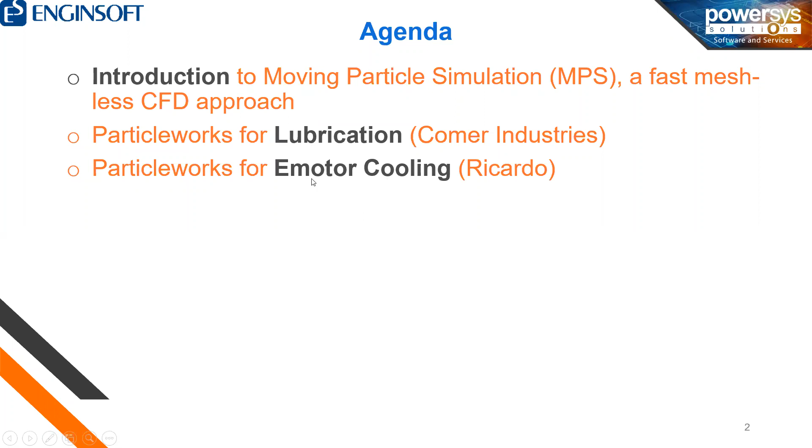Lubrication, of course, is the historic milestone, the first application for Particleworks, in lubrication in gearboxes. E-motor cooling is a very important application that's increasingly of interest, and we will present some test cases in collaboration with important players. Then I will mention the coupling with JMAG and how we can transfer the files and information, namely the HTC information, the heat transfer coefficient maps, to a JMAG solver to perform the thermal analysis.

Other applications are piston cooling, hydropower generation, and also the field of food and beverage. We will cover all of that with some examples, just to give an idea of all the fields and the capabilities of the software.

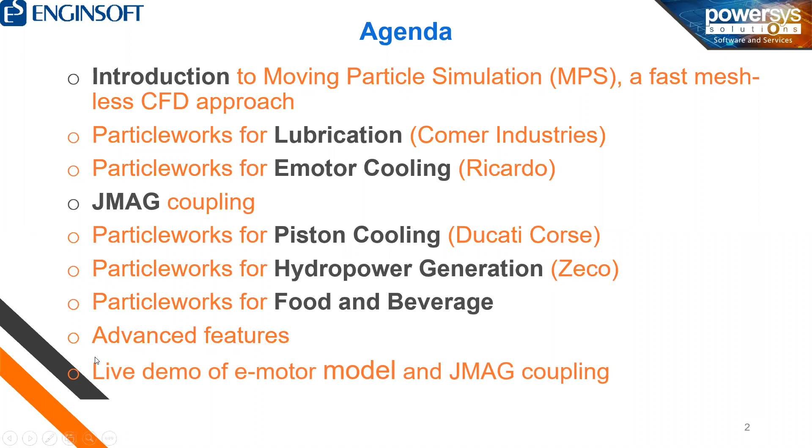In the final part of the presentation, I will present some advanced features of the software that could also be of interest for you. And then in the second half hour, we will do a live demo, just to give an idea of how fast setting up a simulation is.

Talking about the methodology, as already mentioned, Particleworks is based on the meshless MPS approach, the moving particle simulation approach. In this approach, the fluid is discretized with particles. We don't have any mesh to be generated; in fact, the mesh is based on the particles themselves.

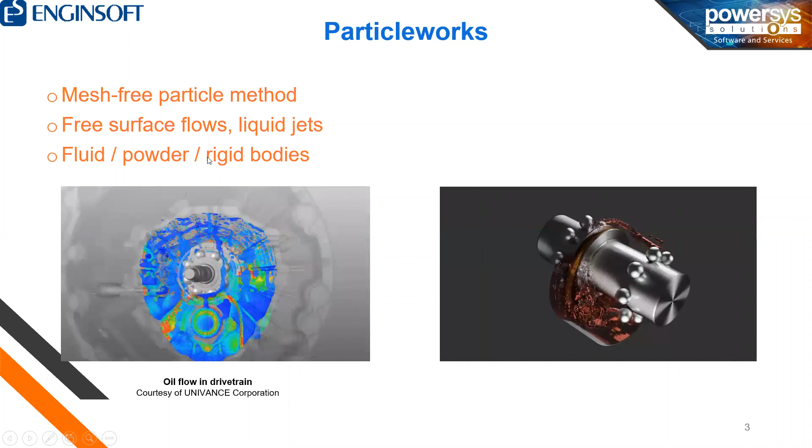This methodology is very ideal when we have a lot of rotating elements, because again we don't have the mesh to deal with, and it's very easy to set up the case. Also, when we have splashing phenomena or jets, it's very suitable. Here is another example with a rigid body coupled with the fluid solved with Particleworks. We also have multi-physics solutions like fluid, powder, and rigid body coupled with the fluid.

As I mentioned, contrary to what is found in conventional methods, we don't have a static mesh on which we solve the basic CFD equations, Navier-Stokes and the continuity equation. Instead we have this dynamic mesh. The idea is that every little particle is representative of a certain amount of oil, a volume of oil, and we solve the usual equations with this Lagrangian instead of Eulerian approach — a dynamic mesh that is able to follow the fluid flow.

This methodology was proposed by a professor in Japan, Professor Koshizuka, who is also a co-founder of the developer of Particleworks, Prometech Software.

Since mesh generation and CAD preparation are no longer really present with this methodology, you can see that the simulation workflow is significantly faster. In fact, in less than 1 day we usually have a working setup.

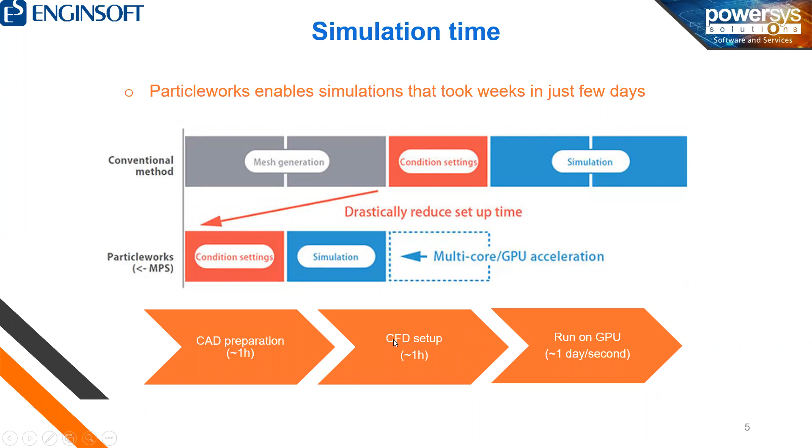And when we launch the simulation, the algorithms behind Particleworks, which are highly parallelizable, can take advantage of GPU acceleration. So we can launch the simulation on graphic cards instead of cores, and we usually see a very strong acceleration. Because of that, what previously in some cases took more than a few weeks can now be simulated in less than 1 day, or surely less than 1 week.

What are the applications that can take advantage strongly of this approach? As I mentioned, gearbox lubrication is the main field, the historic starting point for Particleworks, because you have rotating elements, you have splashing, so you have all the basic, let's say, features of a system that is highly compatible with Particleworks.

Also, e-motor cooling is nowadays very important for the automotive industry. We have jets on the windings and all the critical elements, as we will see, and we can analyze those very efficiently with Particleworks. We also have the possibility to study highly viscous fluids like chocolate, glue, cement, and so on, because we can include different viscosity laws.

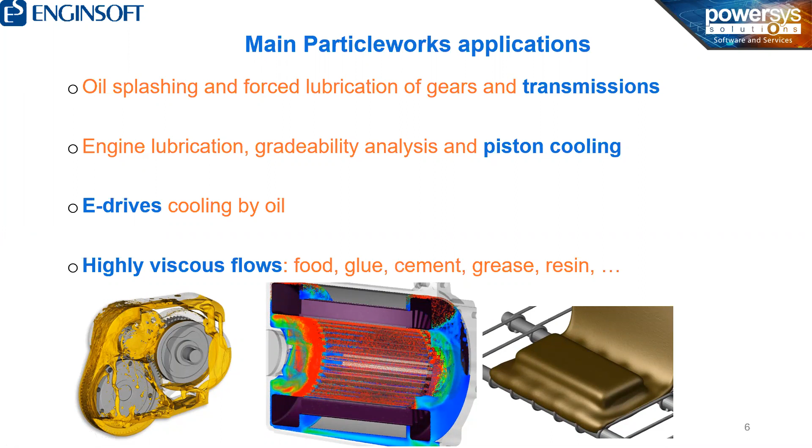On that, we can also model grease, so a very, very viscous fluid, as you can see here for bearings lubrication. Bearings lubrication is very important. We also have another example here with the rollers moving with a specific rotation on top of the rotation of the shaft. We will not have time to go in detail on this model, but it's very interesting also to see the pumping effect of the rotating rollers just below here.

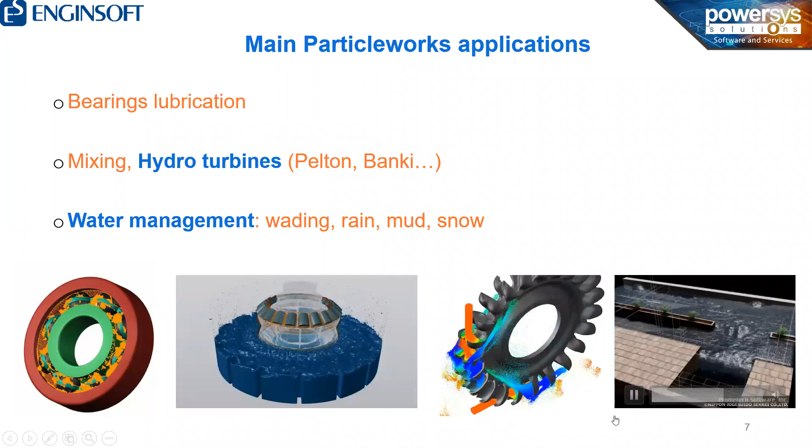Then we have hydroturbine analysis. This is also a very interesting field. We will present some results in detail. And of course, civil engineering applications for water management, as you can see here. So let's go in detail about the applications and also the validation with experimental data.

The first test case I want to show you is the analysis of the coupling gearbox found in this system. The application is a wheel loader, and this element was analyzed with Particleworks in collaboration with Comer Industries, a big Italian producer of gearboxes and axles. The idea was to evaluate the lubrication of this system at different rotational speeds and rotational directions, as well as mounting angles. The target was to compare results from simulation with experimental data.

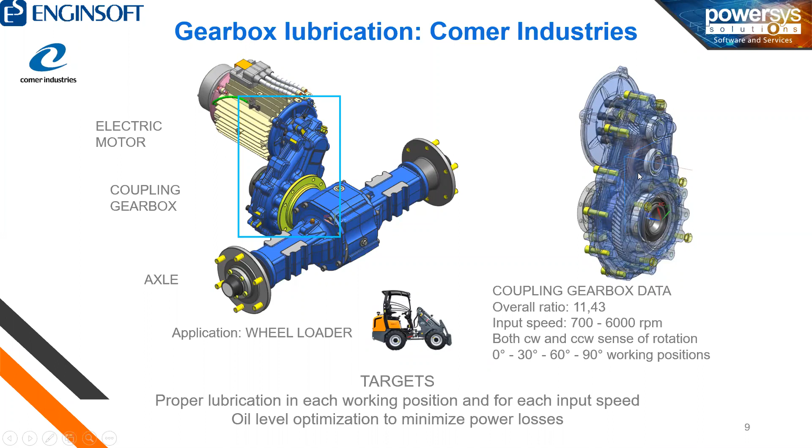What is usually done in this kind of system is to build a clear casing, as you can see here, and analyze the oil distribution visually. Of course, this type of testing requires a lot of cost in producing and manufacturing the clear casing, and also waiting times, because the production is not instantaneous.

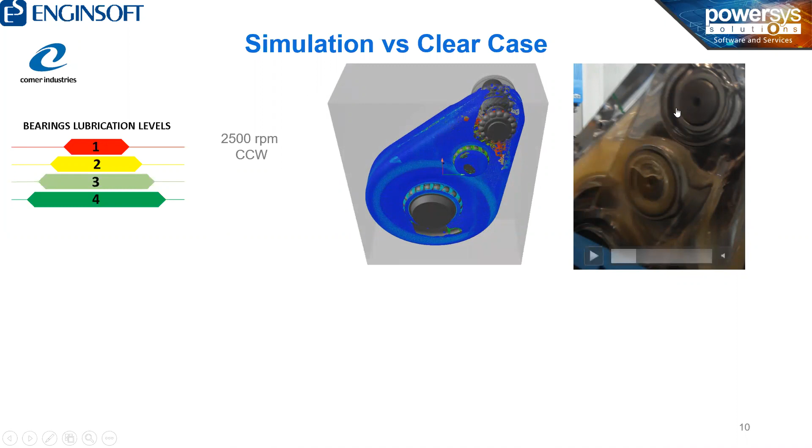We can see here a comparison between the simulation and the same system at the same load condition, and we can quite clearly see very interesting relationships. We have the film formation in the bearings area here. We have very low lubrication on top, as you can also see in the clear casing. Overall, we compared for the different conditions the lubrication degree in all the zones, and found very good agreement. The numbers here represent very good or very bad lubrication levels, and by visually comparing the two, we could see very good correlations across the conditions.

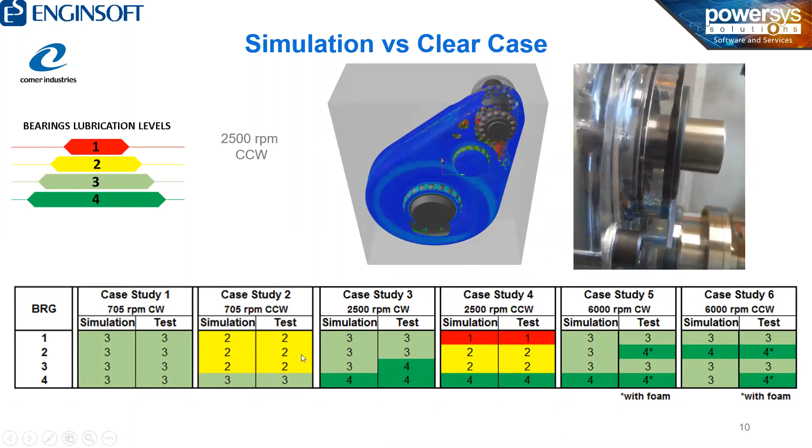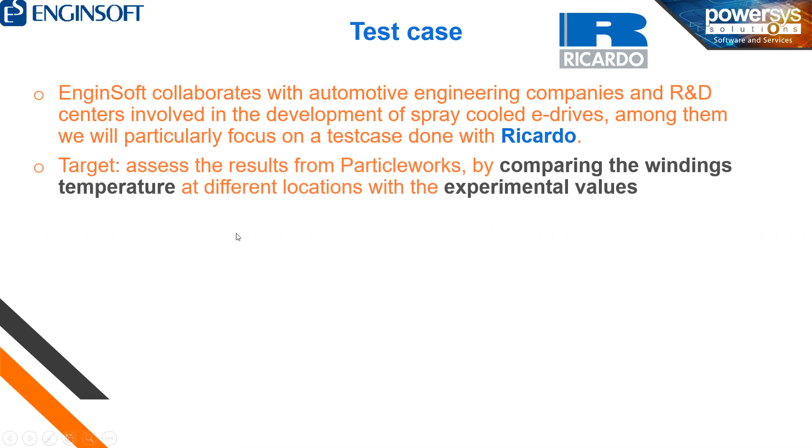On e-motor cooling, we have a very interesting test case and confirmation with Ricardo. We collaborated with them on a project where the aim was to evaluate the temperature distribution, especially in the windings area, one of the most critical areas in e-motor design for automotive applications. E-motor development is a very important topic right now, and power densities are increasingly higher. Because of that, we really need to optimize the cooling; air cooling is not enough, and we want to introduce oil cooling.

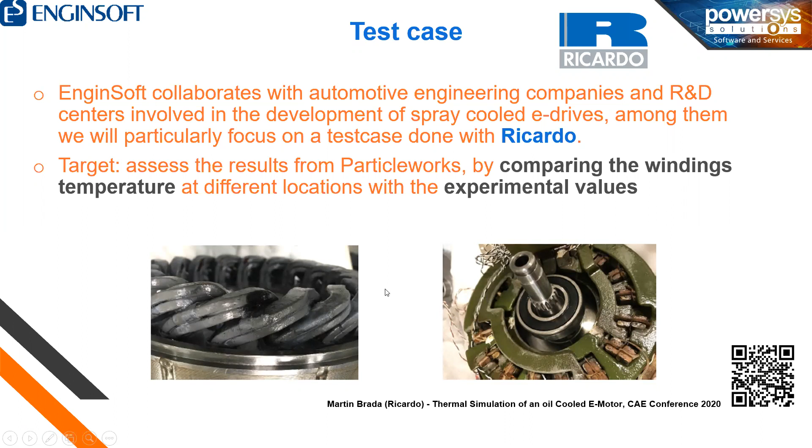The results are also presented in a more detailed paper; if you want to have a look, we have the QR code here. So what is the workflow with Particleworks for e-motor cooling? We usually do the e-motor fluid analysis, then transfer the heat transfer coefficient from Particleworks to the thermal solver, in this case JMAG, which can also compute the electromagnetic losses. We will see how efficient and fast that step is, because we have developed a coupling between the two software. At the end, you want to understand the temperature distribution.

In Particleworks, the e-motor fluid analysis is structured in different steps. We can do, as you can see here, the analysis of the rotor distribution in all the channels. We can also do a jet analysis after the rotor step is done. We can include windage effects and air, since the rotating rotor will cause an air field inside, so we can take that into account.

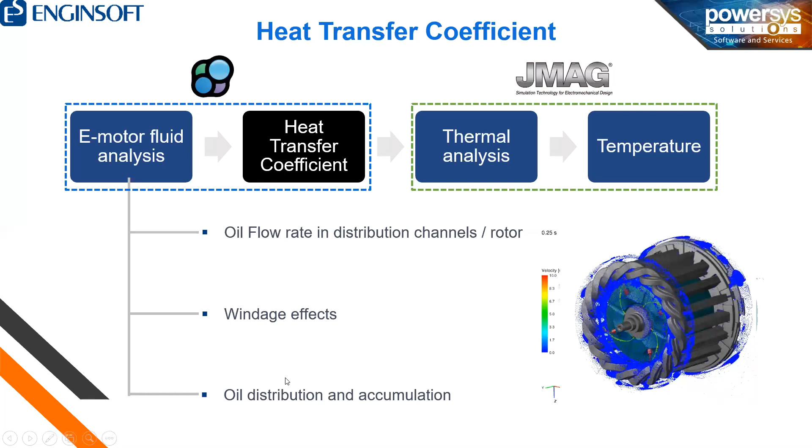At the end, the most important aspect is to analyze the distribution of oil on the windings and in the casing, and where accumulation is. Of course, the last objective is to evaluate the HTC maps on the windings or other critical areas, as you can see here.

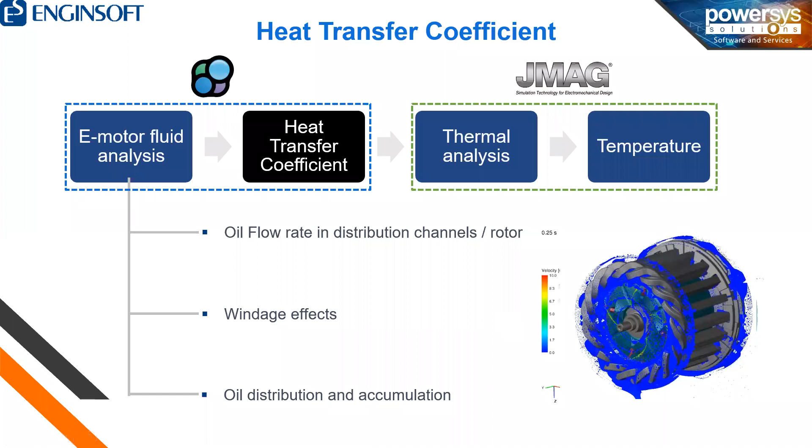So from the accumulation of oil, we can extract the HTC maps. HTC maps are then transferred again to the thermal analysis, and temperature distribution is found.

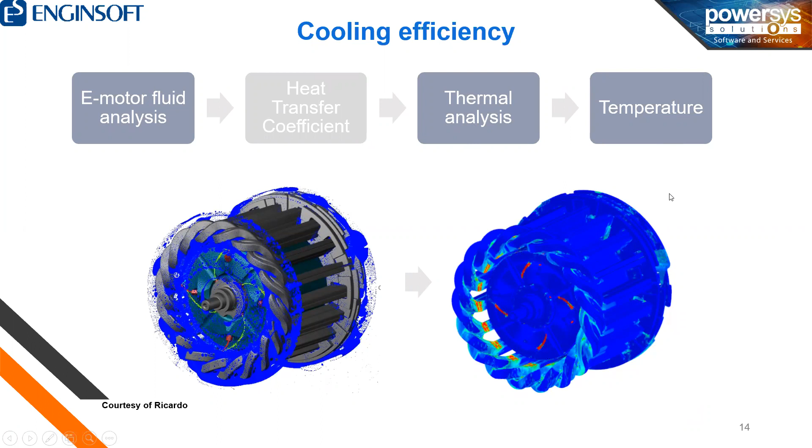In this case, as I mentioned, we wanted to compare the simulation results with the experimental one. The objective was to find a maximum temperature difference between simulation and measurement of 5 degrees. All points in the windings area monitored by Ricardo were actually found in a much smaller range, with a maximum difference of 2.8 degrees, as you can see here. So Ricardo was very happy with this validation, and it was well inside the range they expected.

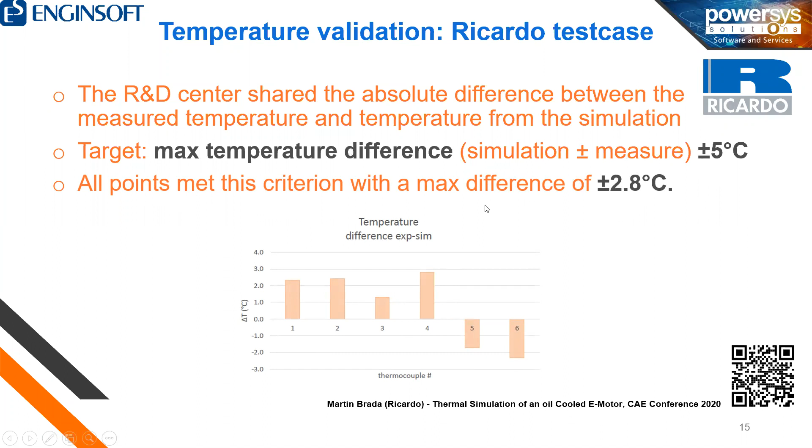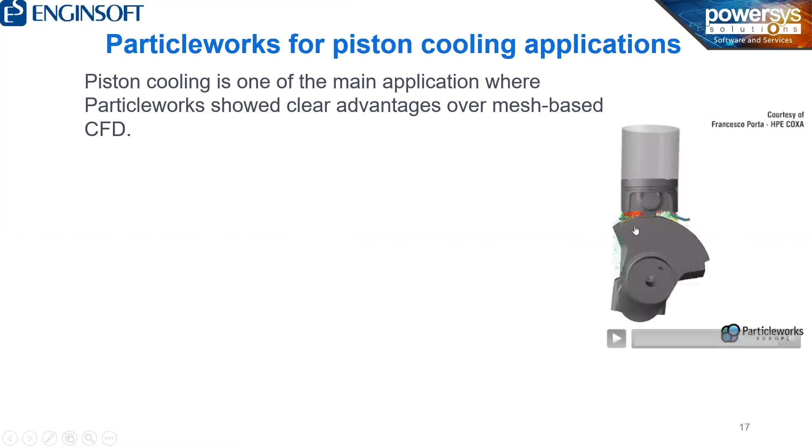Piston cooling is, of course, another interesting application. As you can see, thermal analysis in Particleworks is really one of the main features our customers use, so we have different studies also in this field. Clearly, due to the moving parts and the jets impinging on the piston, we have a lot of advantages over mesh-based CFD.

We have one study with Wärtsilä, a company that produces large motors for naval applications, so very big pistons in this case. Wärtsilä also compared with experimental data in this case, finding very interesting correlations.

HPE Coxa presented last year, or recently, another comparison between meshless MPS and traditional CFD. In this case, the comparison was with Star CCM, and they found that MPS is 10 times faster than mesh-based CFD with very similar results.

This is the visualization of the results for that type of system. As you can see, we have 2 jets impinging on the piston, causing the cooling of the piston.

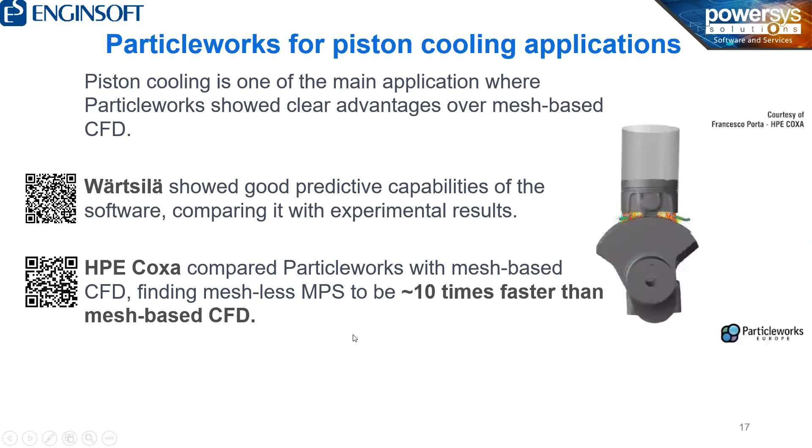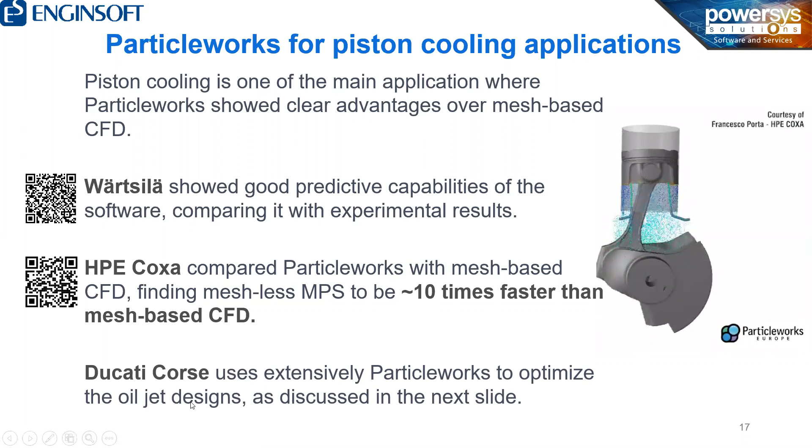Ducati Corse is also our customer. This is public information, as they also published another interesting paper on how to optimize jet designs. We will actually see the Ducati Corse study here. So the idea is that they want to optimize the jet

direction and shape to optimize, as you can see here, the HTC maps and the cooling efficiency in the piston. So they propose different types of application with different splitting of the flow, and they compare the temperature distribution. Again, if you want more details, you can find them following the QR code or visiting the Particleworks Europe website, where we have all the material.

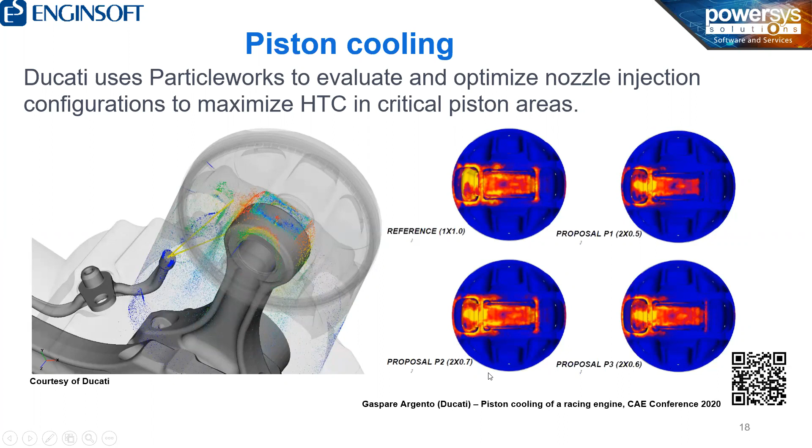Hydropower production is very important as well. I can present you this benchmark in collaboration with a Pelton turbine manufacturer in Italy, Zeco. They contacted us to evaluate Particleworks because they actually use mesh-based CFD, but cannot do full turbine simulation with this methodology. They cannot account for the transient simulation.

They really take a lot of time to do Pelton turbine analysis with traditional methods. So they wanted to investigate whether Particleworks could be faster and more precise, or similarly precise, while also providing additional information like casing-jet interaction or jet-jet interaction, multi-jet analysis.

So the system is schematized here. Those are the results from Particleworks. We have the rotating turbine and the two jets. As you can see, we simulate two jets and the entirety of the turbine, while traditional CFD needed to split up the geometry and focus on a very detailed element and part of the turbine.

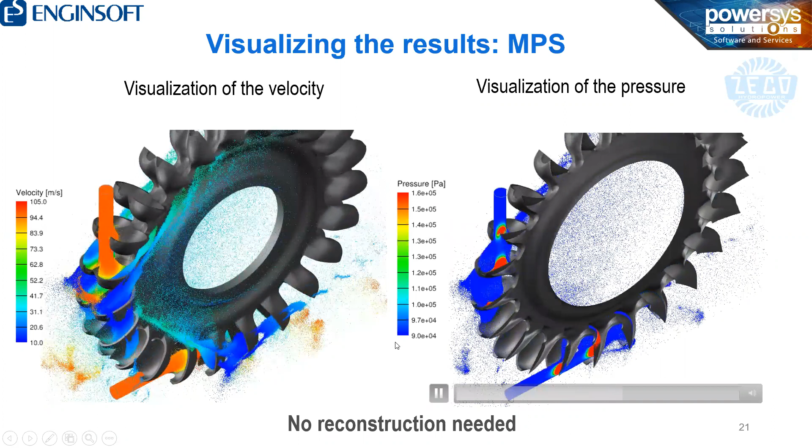So those are the summary of the results, just to give you some numbers and an idea of how fast Particleworks can be compared to traditional CFD. Traditional CFD for this kind of system required 3 working days. Particleworks preparation took only 2 hours, and the simulation time was 70 hours compared to 2 hours.

We simulated approximately double the amount of rotation angle, and we simulated the complete turbine, while mesh-based CFD only simulated 4 buckets - four half buckets, sorry. The multi-jet analysis was also not feasible, and other considerations like casing interaction or jet-jet interaction were not possible. The absolute values of efficiency compared to the theoretical model efficiency were very similar and comparable, so results were approximately the same.

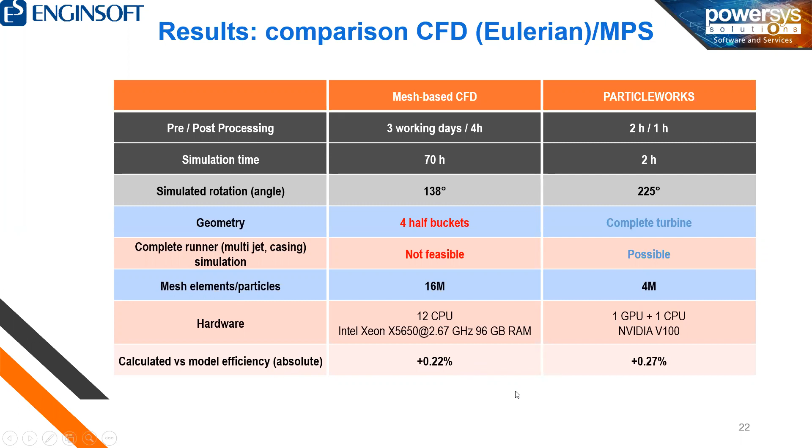Food and beverage is also a type of application we can address. For instance, we can study filling - bottle filling, or other types of filling found in the food and beverage world.

Another feature that we can take advantage of is the non-Newtonian viscosity law that we can include with Particleworks. Also, the thermal capabilities are important for sterilization purposes, for instance. So all of these features are promising for, let's say, food and beverage applications. I can give you some examples also in this case.

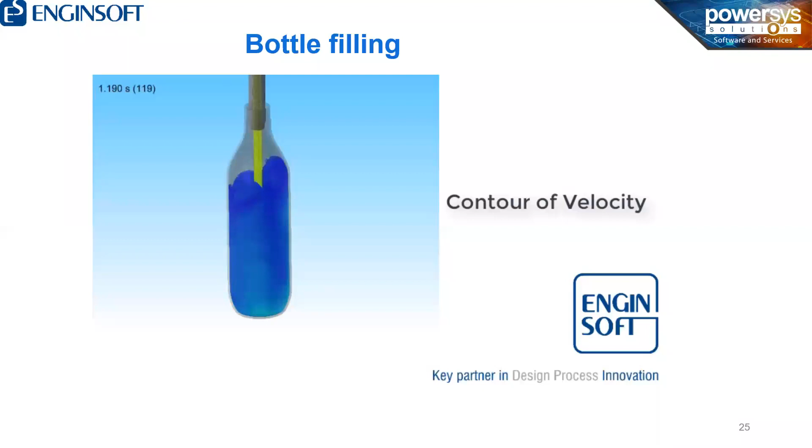Here we have a bottle filling application. So of course here we do have a lot of free surface flow, also bubble inclusion during the filling. This is found to be very interesting and to be studied with Particleworks.

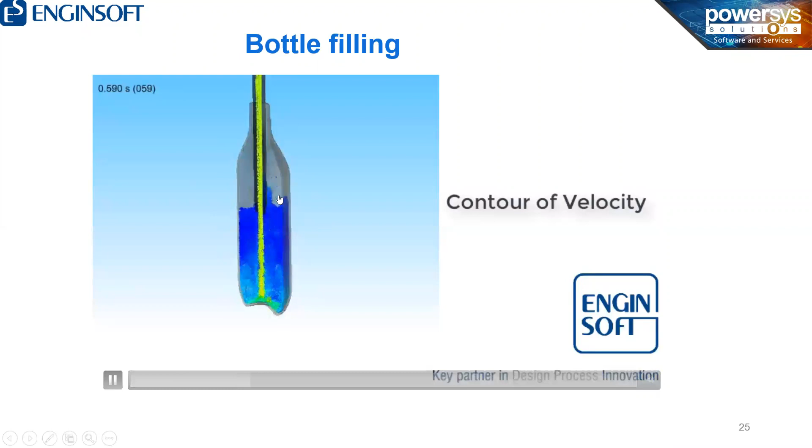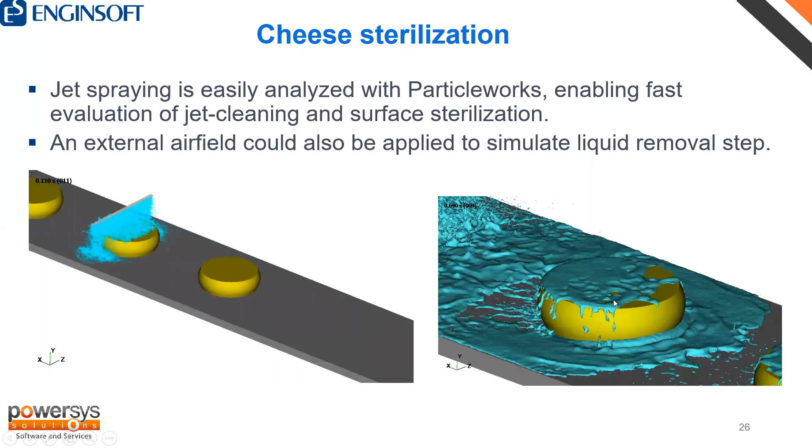We have, for instance, sterilization of food. In this case, we have a cheese sterilization, so we can study the jet of water or the sterilizer fluid on the cheese. We can see the accumulation and also study, let's say, the temperature distribution or the wetted surfaces during the sterilization. So we can really optimize the design of the sterilization machine and the jets with this tool.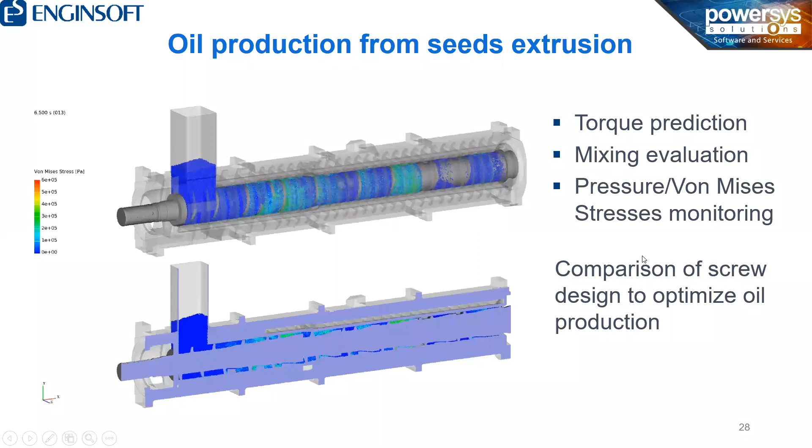And we can clearly see the pressurization due to the screw effects. And we can optimize the torque and the mixing, pressure, and so on. This just to give you some examples of applications that we had a look at with customers. Okay, on the application, I think we are done. I'm going slightly faster than I would like because there are a lot of things to cover also for the demo.

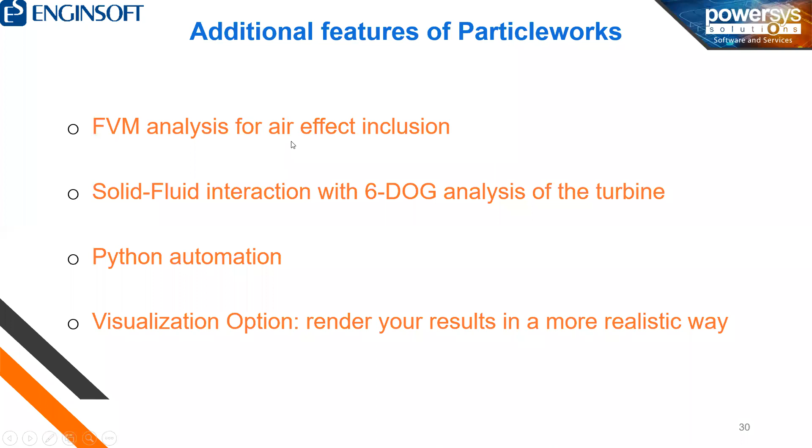So here, just an overview of the additional features and capabilities of Particleworks that could be of interest for you. I will go through them in a very quick way. So one feature is the finite volume air analysis. The idea is that in this case, we can have a two-way coupling between air and fluid. The air domain is discretized with a Cartesian grid with a finite volume solver, so a very different solver from the MPS meshless solver. Everything is done in Particleworks in one simulation.

And as you can see in this bottle pouring application, we can clearly see the coupled effect between air entering the bottle and creating bubbles, and also water that is, let's say, dynamically influenced by the air pressure field in the entrance.

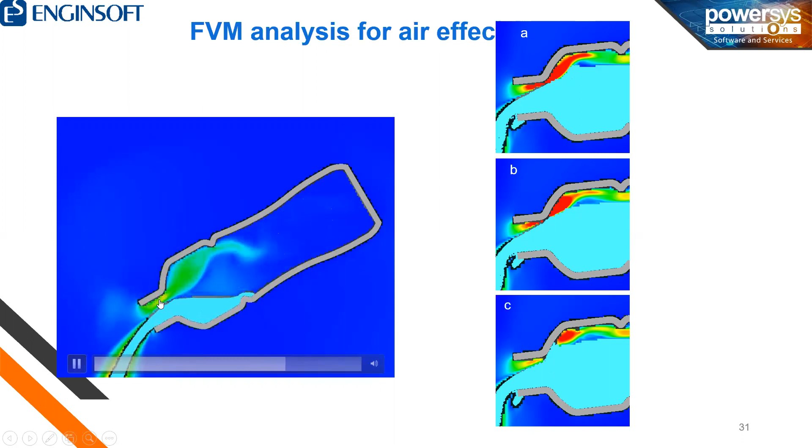Another feature is the possibility to automate the scene generation, so the simulation setup, with Python. There is one module written on purpose for Particleworks, so we can control every aspect of a Particleworks simulation with a Python module that is named PWPy. So in this example, we scripted with Python a gearbox simulation.

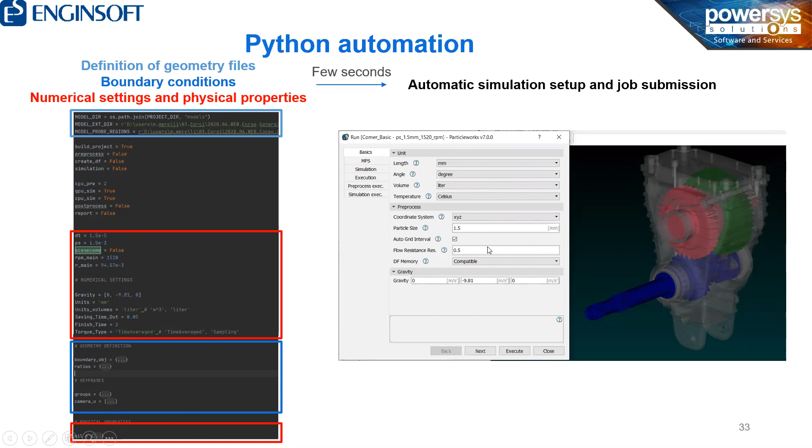We set up the numerical settings, the boundary conditions, the geometry files were collected in a specific model folder. And after defining the physical properties of oil and so on, we could run the script, and the result was the creation of the Particleworks project, with the import of the geometry and the definition of all the numerical settings. We can also, with the script, run the simulation without opening Particleworks and the GUI, and also perform the post-processing in an automatic way.

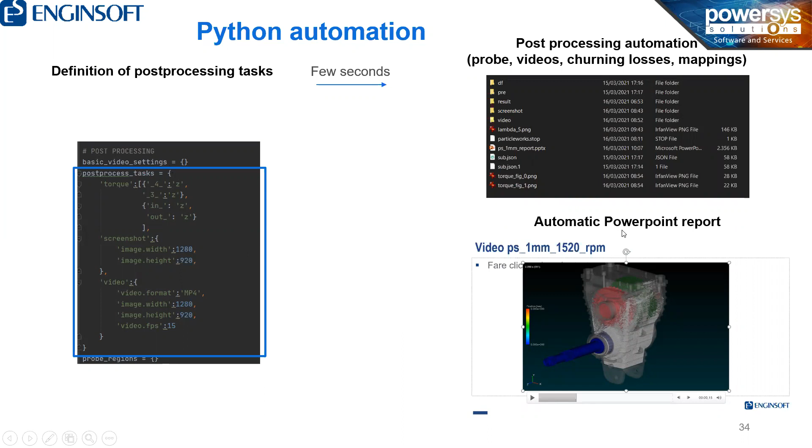So this can really speed up the reporting and the analysis of different configurations. In this case, we also plotted torque plots, and we also prepared a PowerPoint report, including videos, just to give you an idea of what could be the possibilities.

Another feature, and this is the last feature before the demo. After this presentation of Particleworks, Didier will briefly present JMag as well, and then we will show you the demo of an e-motor model, and we will show you all the steps for the simulation in this kind of system, and also how to transfer the file to JMag. So the last feature I want to present before the JMag presentation is the visualization option.

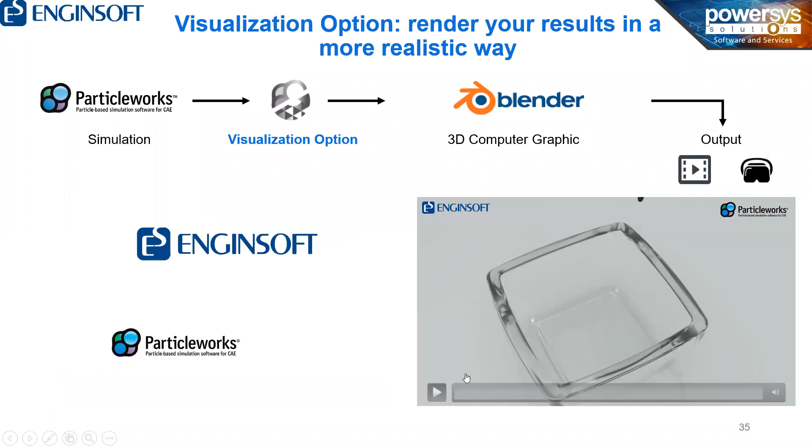This is a software able to move results from Particleworks to a 3D computer graphics tool. So the idea is that you do the simulation, then you transfer the results, for instance, to Blender or Unity, these 3D computer graphics tools. In this way, you can do very nice renderings of your simulations for visualization purposes or also marketing purposes.

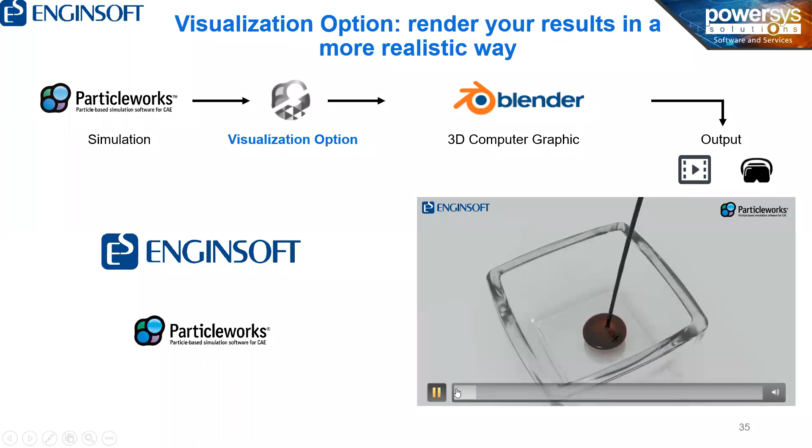Actually, the output that we get from this kind of 3D computer graphics model can be a video, but also a virtual reality environment that could be accessed by a VR viewer like Oculus. So we could inspect the results from our simulation with the VR tool.

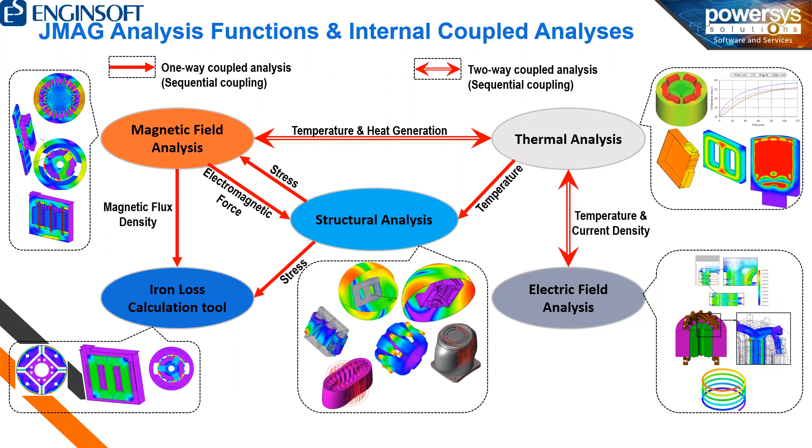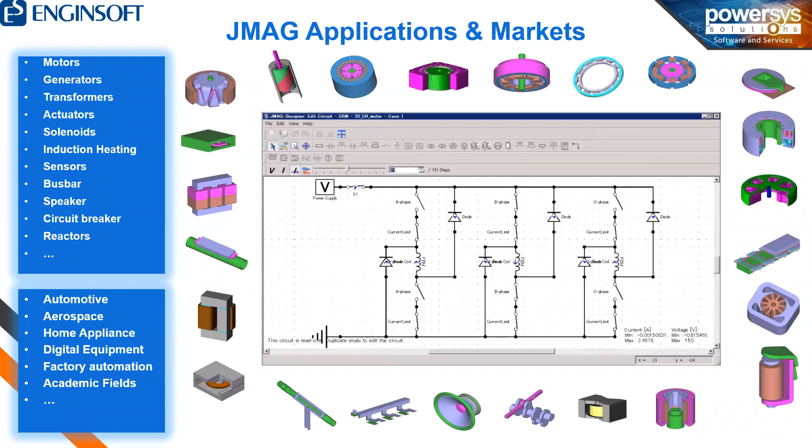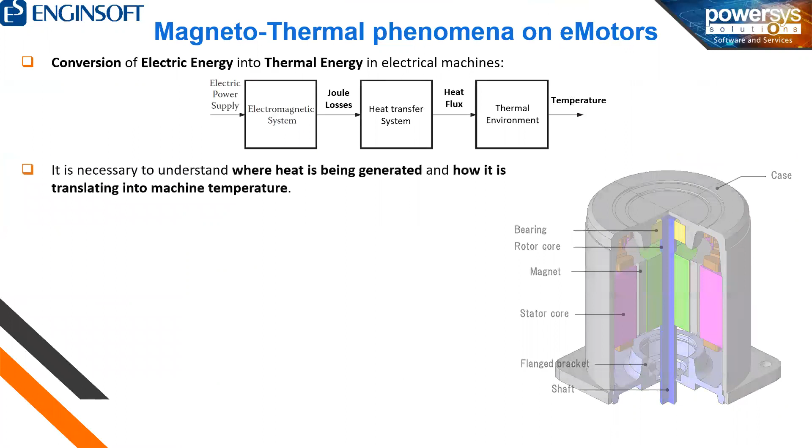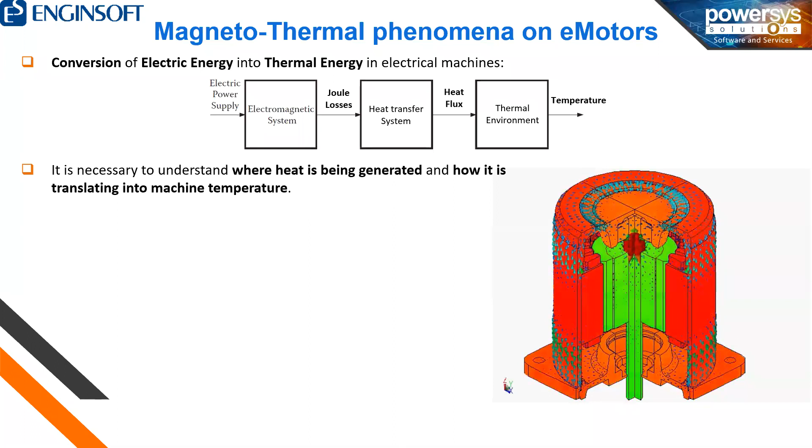Okay, so regarding the different application motor types that we can simulate with JMAG, we have generator, transformer, so all types of electromechanical systems can be simulated with JMAG. And inside JMAG, we have a lot of features to model the motors with more precision. So regarding the loss calculation, we know that in the electric motor it is very important to know how the heat is produced and how this is converted to a temperature. So for that, JMAG is able to calculate different losses.

So JMAG is able to calculate, for example, the iron losses due to the variation of the magnetic field inside the steel sheet of the motors. So you will be able to get the hysteresis loss and the eddy current loss in the steel sheet. You're also able to get the loss in the winding, so the copper loss, and the stray losses in the tank of your motors due to the variation of the eddy current. Okay.

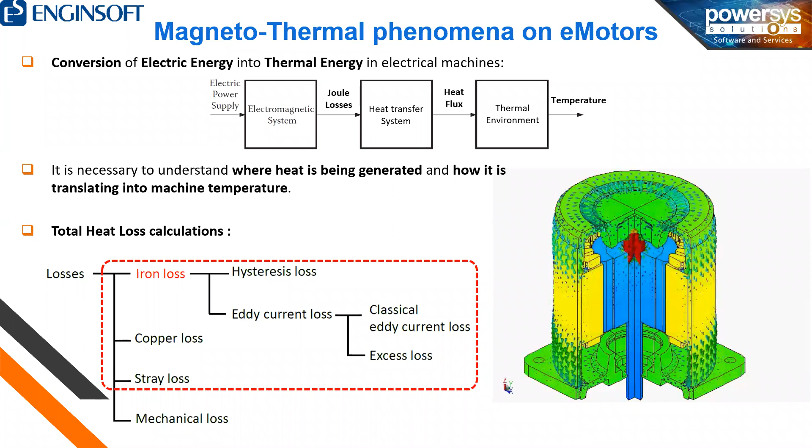Okay, so this is an example of electric motors. So you have different parts. You have the tank, the case. You have the stator here. You have the coil. You have the rotor with the aluminum bar, and you have the shaft with the bearing. Okay.

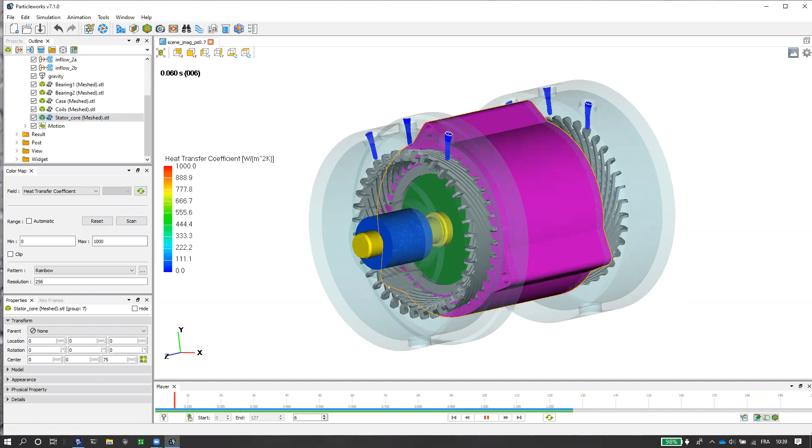So here I can show you the result of the cooling simulation in Particleworks. So this is the cooling here, and this is the distribution. So you can see the distribution of the HTC coefficient on the fluid. So this distribution of the HTC can be extracted using the mapping function here. In the mapping function, you will be able to define the settings to extract the HTC of a specific part. Yeah.

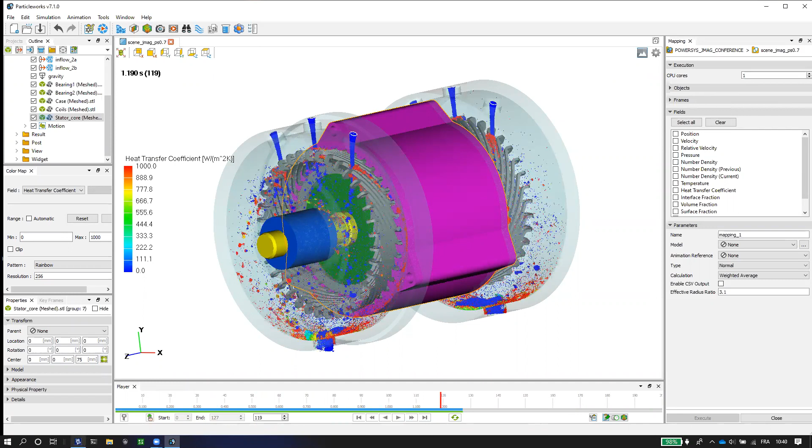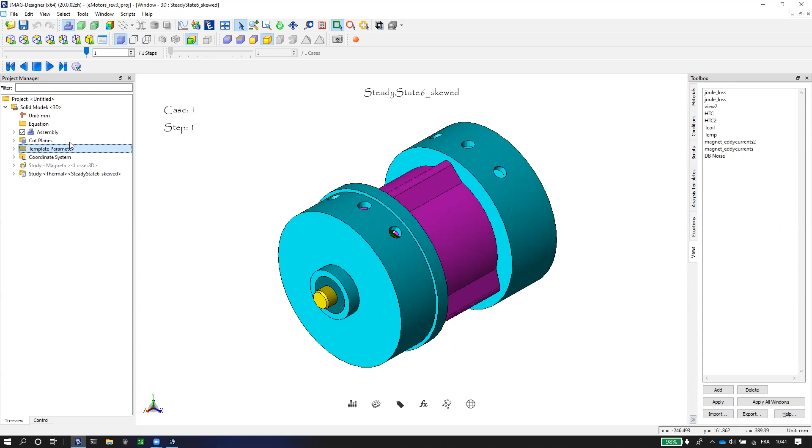You also have some script templates where you can save your scripts, because in JMAG you can use several different types of scripting language like Python, Java, Visual Basic, and you can also use MATLAB to control JMAG simulation. You also have a database to save all the other settings, and also variables and some pictures of your project. Okay, so here regarding this 3D model, so this is the 3D model.

You have the same model here. If I right click, you can see the different analyses that you can apply to this 3D model. So in order to calculate the losses of the motor, I use transient analysis, or you can also use frequency analysis if you want.

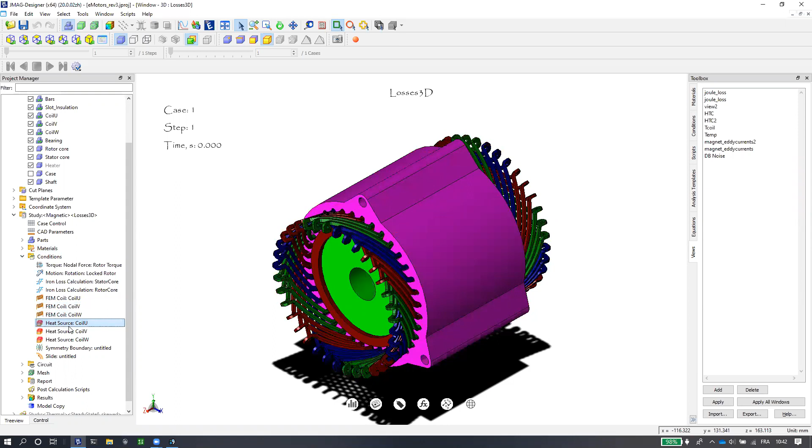I run the simulation. First, I define the material of each part. Here I define also some conditions, for example, to calculate the torque, to calculate the losses, and to define the winding connection. This is to extract the heat losses of each coil.

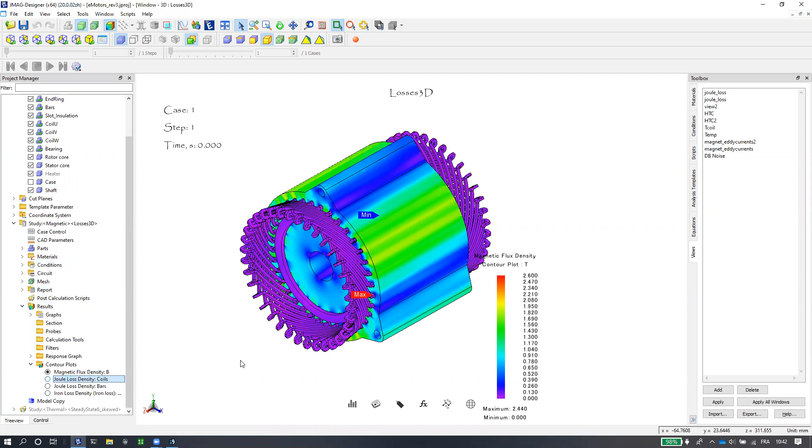I can also show you the result of magnetic field analysis. This is the distribution of the magnetic field analysis. I can show you the distribution of the Joule losses of the coil, and also the iron losses of the rotor and inside the rotor and stator.

After you get the losses, you can create the thermal analysis. Into the thermal analysis, you will define the material, where you will define also the thermal property of each part. Then inside you will define some conditions in order to model the thermal behavior that occurs in this machine.

Here you can see that I defined some heat transfer boundary conditions in order to model the interaction, the heat transfer interaction between the core and the air region. For example, the heat transfer condition between the coil and the oil, I will apply some condition where I will define

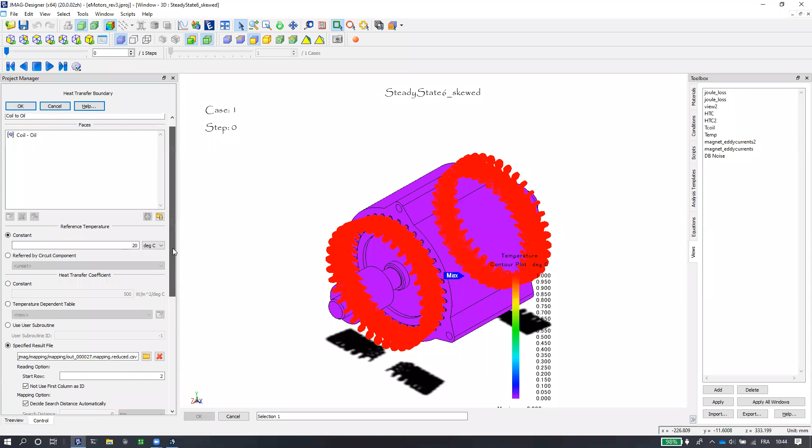the reference temperature, and then I will import the HTC distribution that I have calculated from Particleworks. This is the HTC distribution I get. With that, I will be able to run the simulation and get the temperature distribution on the coil and also on the rotor side and other parts with more precision.

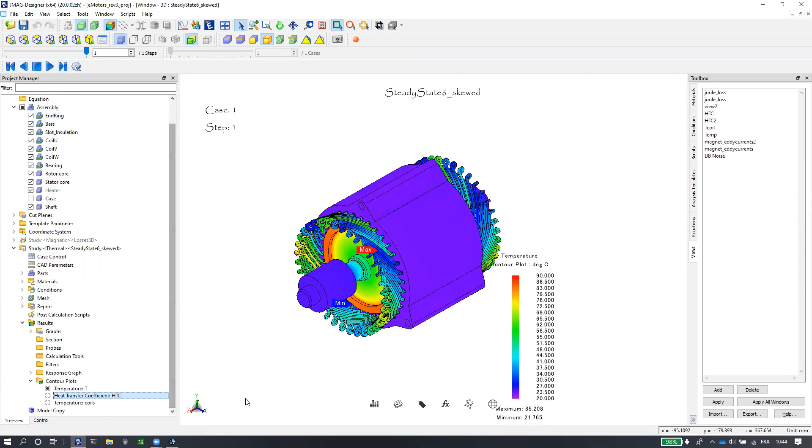Okay, I think it's good for me. Yeah, I will... Exactly. Thank you, Didier, for your presentation.

I want just to take one step back and have a look at how to build the Particleworks project. Because Didier correctly showed you the e-motor model that we built here, I just want to give you an idea on how fast we can get to this working model with Particleworks and what the steps are.

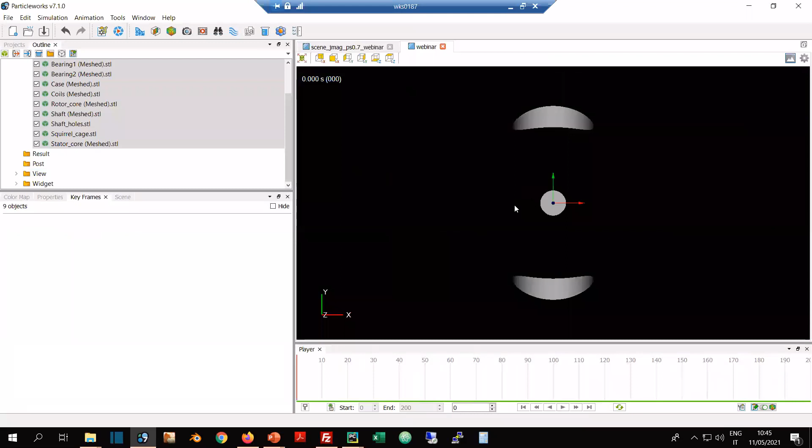So let's create a new scene in Particleworks. A scene is basically a simulation. What we want to do is to import the models. We can import all the models, maybe not the duplicated ones. Those are STL models directly exported by the geometry, by the CAD, so we didn't need to do anything on these STLs.

So we have bearings, the casing, we have the coils, and so on and so forth. These are the bearings, the shaft, rotor, and cages, and so on. We can of course change the color of some of these elements if we want,

but that's all. So the next thing we need to do is to define the inflows. We have let's say 4 inflows on the two sides, so 2 and 2. To do that, we can define a circular inflow. The width is 8, 8.

We have to position it. I will just go through these values that I note down. We can also, of course, import an inflow position from the CAD. So this is one inflow positioned correctly in theory.

So we can duplicate that inflow and adjust some settings. We have 1, 2 inflow. And then those 2 inflows are like that. So in this way we created all the inflows, just as an idea.

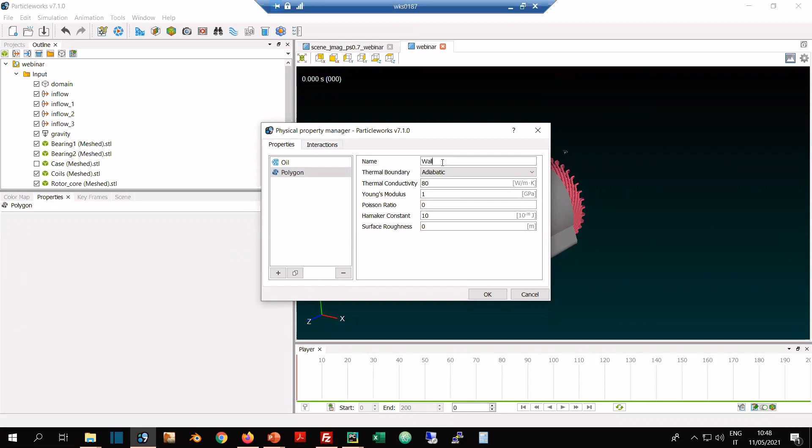We need to define the wall. In this case, it's just one slip, no slip boundary condition that is adiabatic everywhere for this kind of application. Just for this tutorial, we stay there. We can also define different temperatures, do the thermal analysis in Particleworks, but for now we just focus on the temperature independent HTC extraction computed by considering Nusselt correlations.

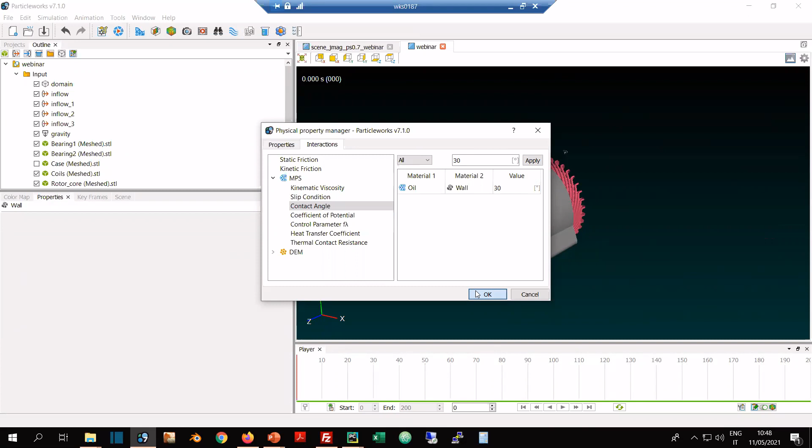So we created the fluid and the polygon. We can assign oil to the inflows and shaft. So to the walls, we define a wall boundary condition. Then to make the bearings and the rotor and the shaft rotate, we needed to define a group, a rotating group.

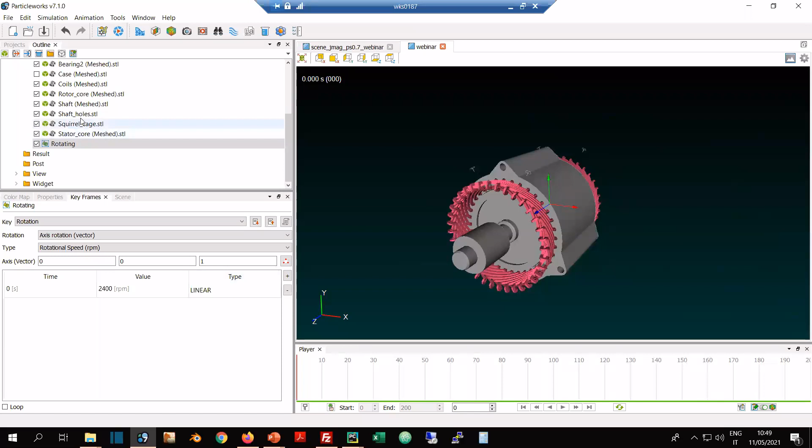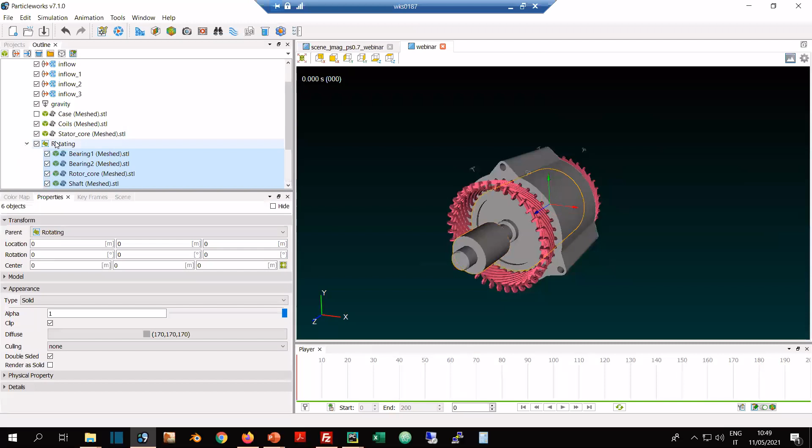So the rotating group, we can make it rotate along Z with a certain RPM speed, for instance 2,400. Then we select all the elements that need to be rotating - rotor, shaft, squirrel as well, maybe. In the properties, we can define a parent, and set rotating as the parent, so everything in the rotating group now rotates.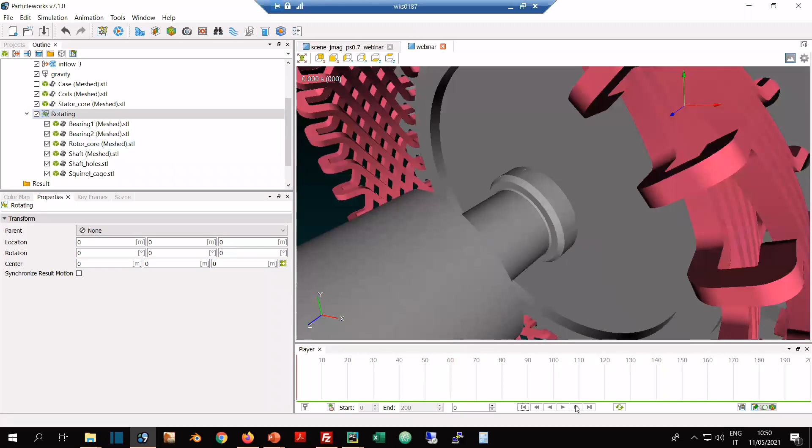Maybe slowing down this simulation preview interval a little bit. As you can see, it's not quite clear to visualize, but the rotor and the shaft are clearly rotating, okay? That's more or less all, I think.

We just need to adjust the domain. This is the simulation domain that at the beginning is initialized in a very specific region. If we adjust the domain, everything inside the box will be simulated - particles can exist inside the box, basically.

Okay, that was done as well. Now I think we just go through the numerical settings - we change the units. Particle size in this case is basically the mesh size, 0.7 millimeter. The gravity is in the Y direction.

Explicit solver for pressure - I'm just inputting basic values, or actually values I pre-calculated. So viscosity explicit, surface tension model, one standard one. Then heat transfer coefficient - we want to extract an HTC that is temperature independent. We don't do any thermal analysis or conjugated heat transfer analysis, we just extract HTC from Nusselt correlations at this stage.

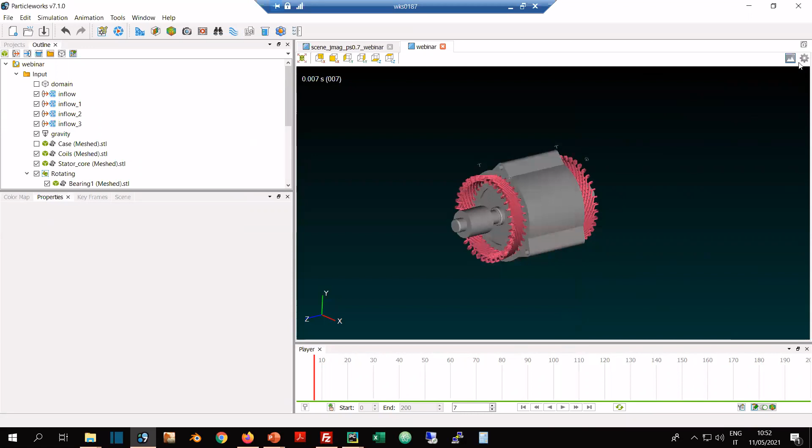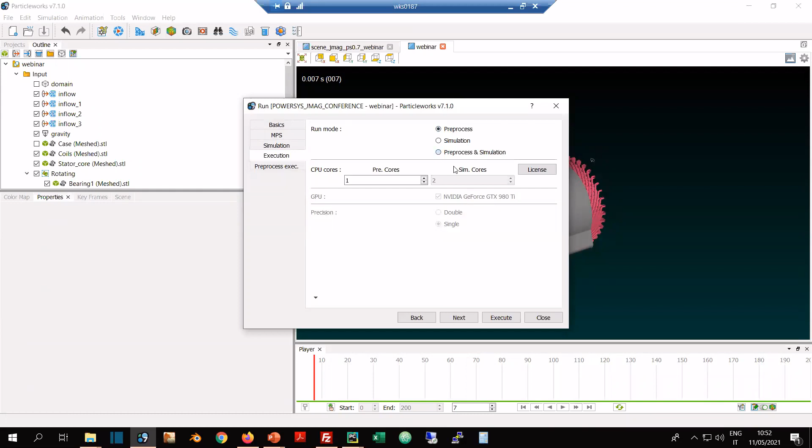Yes, that should be more or less everything we need to do, just some advanced features and options, Courant limiter, and this parameter that has to be changed. Okay, so we have everything set in 10 minutes or so. We can do the pre-processing and simulation, which will be done on an NVIDIA graphic card.

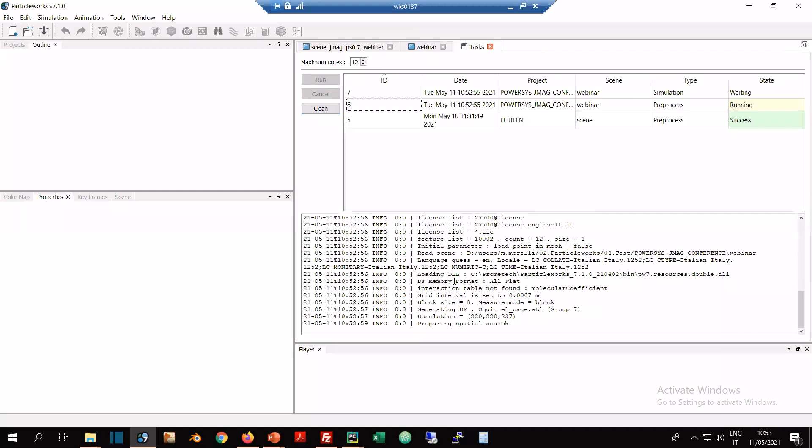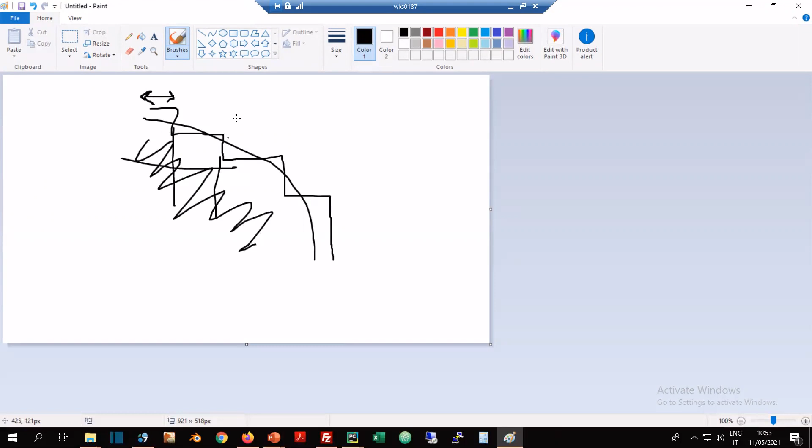So let's see if I did everything correctly or if I forgot something. In the pre-processing, the software will discretize every STL with a specific grid - the idea is that we create a Cartesian grid representing the surface. This grid size is usually in the range of the particle size or a little bit less. So in here particles cannot be, but of course here they can.

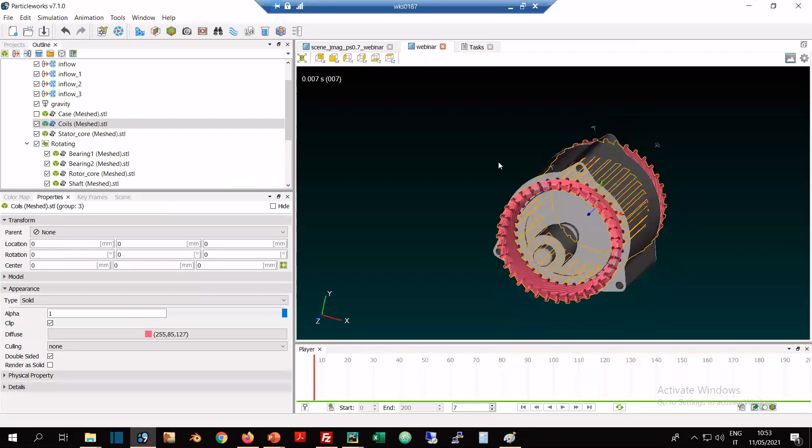So yeah, in this case it's doing the distance function - this is the name of the function I just presented to you, the distance function of one STL. We will do this for all the STLs, and then we will have some results that we can inspect while the simulation runs, directly in Particleworks.

Let's wait a little bit, or maybe we can also look at other results we should have around, as already discussed with Didier. So basically, after a little bit of waiting, we will have this kind of information. We see, in this case, 4 jets, droplets going down, and a little bit of accumulation of oil.

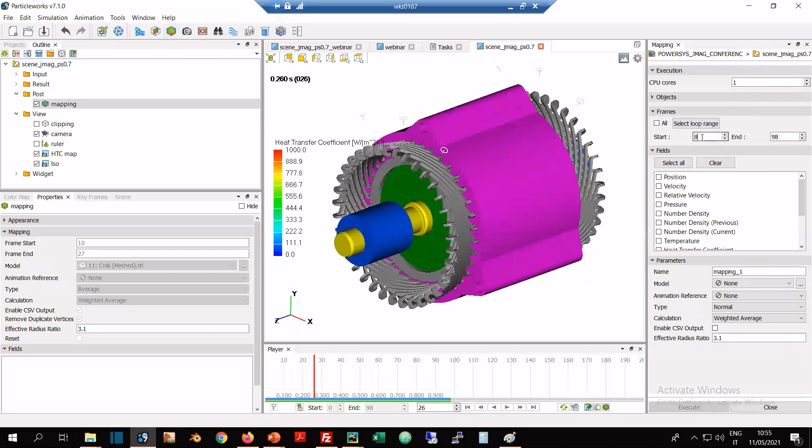And then if we want to have a look at the map, we can see the map. Let's see if we have the map somewhere, or otherwise we can generate the map as Didier also explained. So we can take maybe the last frame, the last few frames. We have to assign the model for the mapping.

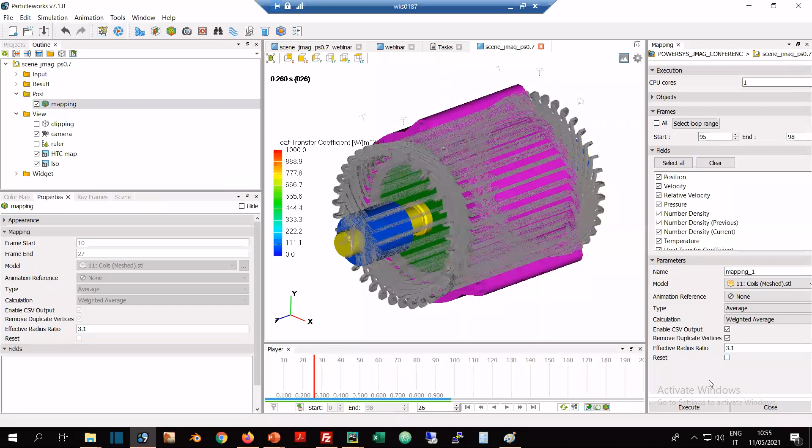In this case, we focus mainly on the coils. We do an average over 3 or 4 frames, and yeah, this should do it. We will see a map of the HTC on the coils, an average map - that is basically what is then transferred to JMAG.

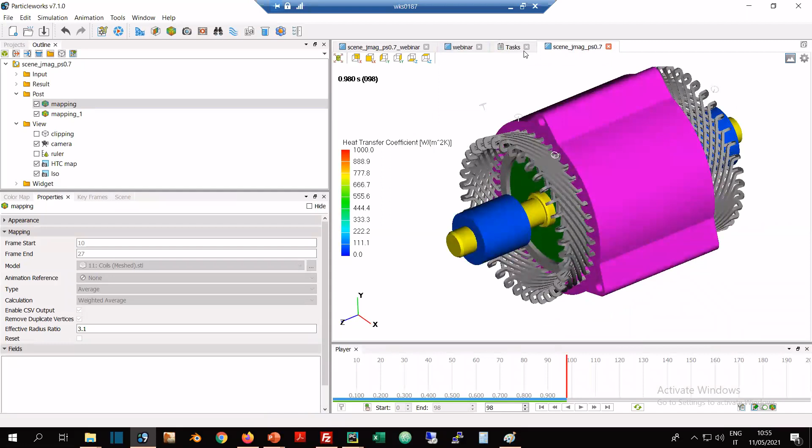Here the post-processing is still going, as well as the simulation, the mapping. While we wait, maybe we can see if there are questions or curiosities, perhaps.